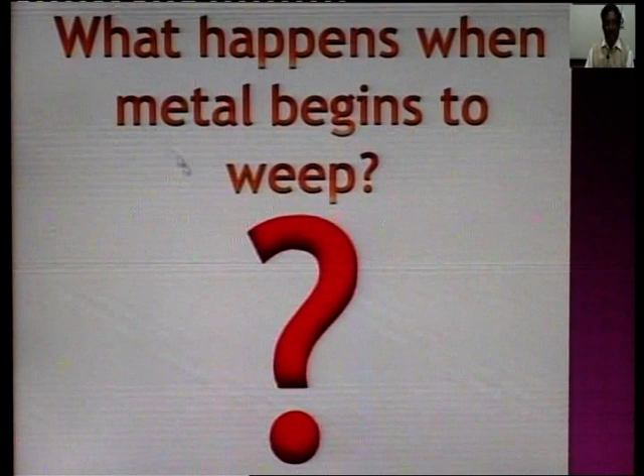So, to recapitulate, what is the importance of corrosion prevention? Why should we think about corrosion prevention? We also came across that corrosion can be described as weeping of metals. What happens when metal begins to weep? Does this lead to disasters?

Yes. For example, we have the Bhopal tragedy. If we see the history of the worst chemical disasters in industries, the first that comes to memory is the great Bhopal tragedy, which happened on the night of December 2nd and 3rd, 1984. The cause of this accident is not clear, but it could very well be due to corrosion, and if such is the case, it may well go down as the biggest fatal accident due to corrosion ever recorded in the history of corrosion accidents.

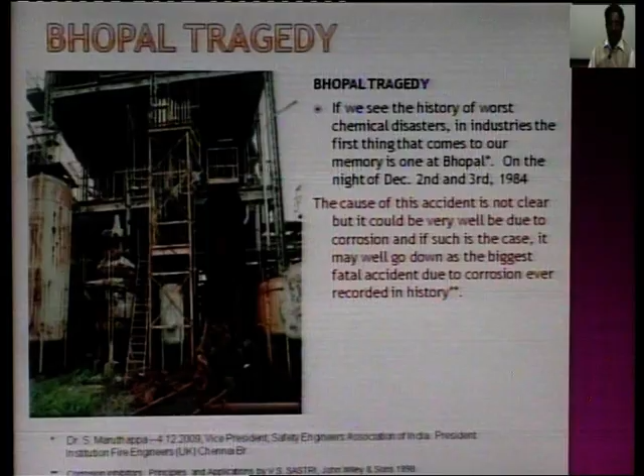Another infamous example of corrosion fatigue occurred 4 years later, in 1988, on an airline flying between the Hawaiian islands. This disaster, which cost one life, prompted the airline to inspect their airplanes for corrosion fatigue.

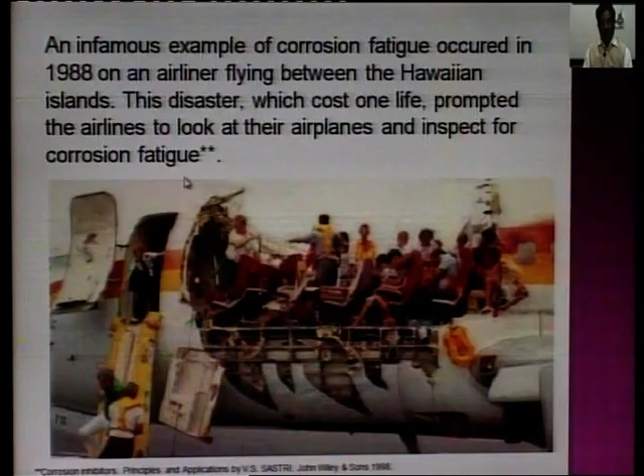So what lesson did we learn from the Bhopal tragedy? Corrosion can be disastrous, but is not necessarily a curse. Thus, to prevent any disasters by corrosion, follow all the measures for preventing corrosion, since prevention is better than cure. Keep all safety-related equipment in order, properly manage safety-related equipment regularly, and keep residential areas away from the plant as far as possible, as we are talking about industrial accidents like the Bhopal tragedy.

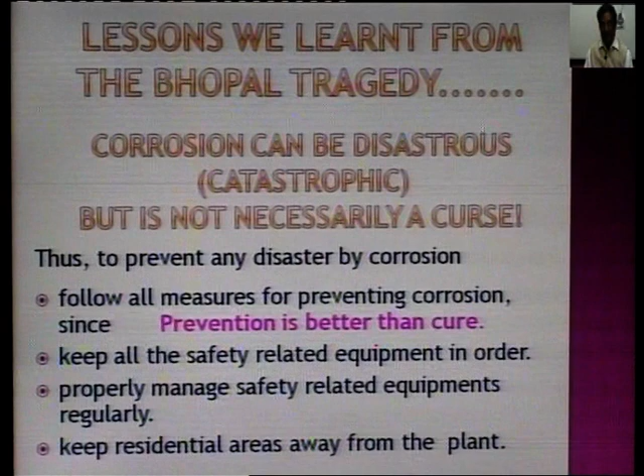So, today's lecture is entirely focused on protective coatings, by metallic coatings and non-metallic coatings. In the previous lecture you must have studied about prevention of corrosion by metal coatings. Today we will see some of the advantages and disadvantages of metallic coating, and we are going to discuss in detail about non-metallic coatings.

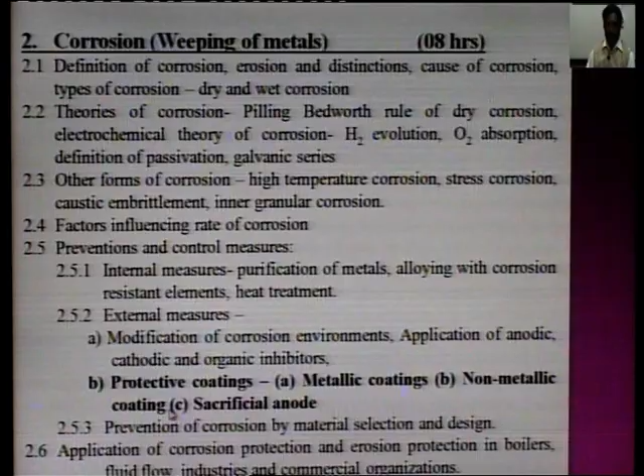So, what are the corrosion preventive methods? You have seen in the last lecture there are 5 of them. One is modification of the environment, second is modification of metal or material properties, which we call internal corrosion preventive measures. Third is use of protective coatings, which may be metallic or non-metallic coating. Fourth, cathodic or electrochemical protection. Fifth, corrosion prevention by material selection and design.

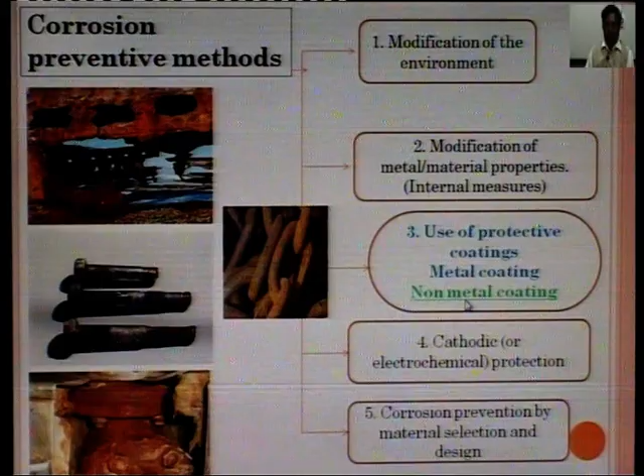So today's lecture emphasizes metal coatings and their disadvantages to some extent, but more focus will be on non-metallic coatings. So, use of protective coatings, either metallic coating or non-metallic coating. Let us look at some terminology commonly used when we study corrosion prevention, particularly by the use of either metallic or non-metallic coatings.

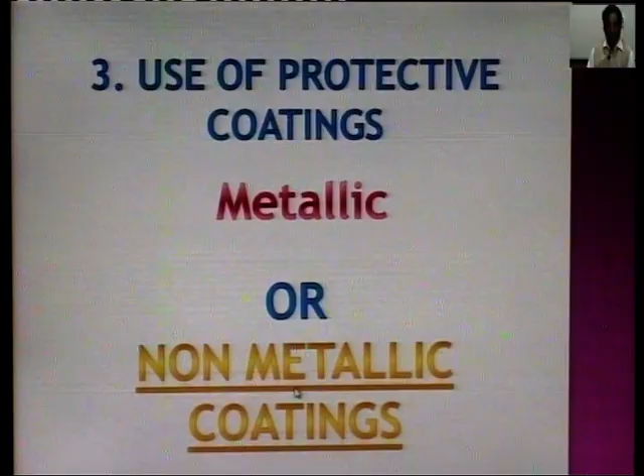The metal surface may be coated with metallic, non-metallic, or organic material coatings for protection against corrosion. Suppose this is my metal which I want to protect - the metal to be protected is called the base metal. The metal used for coating is called the protecting metal. So if I apply another coating of another metal on this, that is called the coating metal.

Let us take an example: iron is coated with zinc metal. In this case, iron is the base metal and zinc is the protecting metal, and such iron or steel is called galvanized steel, depending upon the way by which you have applied this protecting coating. In this case, it is metal we are using.

So, coatings on base metals - what are the merits of the metal which we use for coating purposes? As I told you in the previous slides, if I want to protect iron by zinc metal, then zinc is called the protecting metal.

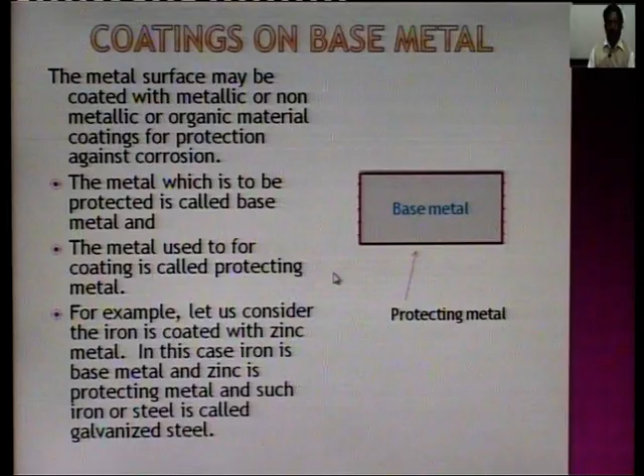On the other hand, if the protecting metal is more anodic, take the example we studied previously: galvanized steel. Here zinc is more reactive than iron. So, if the protecting metal is more anodic to the base metal, then protective coating of such metal on the surface of the base metal is described as anodic protection.

Anode is one which can undergo oxidation. So, in preference to the base metal, if the protective metal is more oxidizing in nature, then we can call that protection layer anodic protection. Anodic protection is a recently developed technology which we will discuss in comparison with cathodic protection.

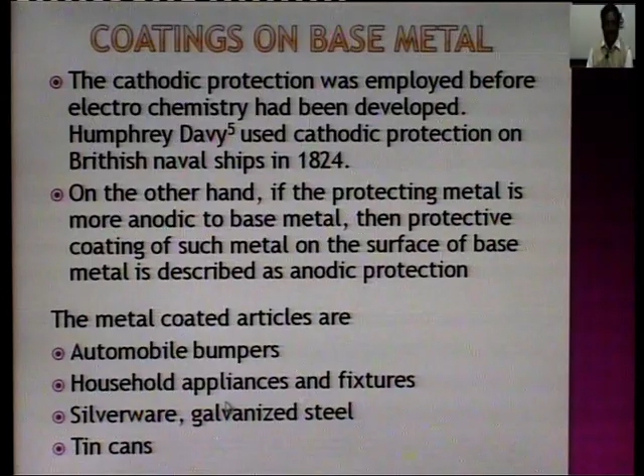Where do you find this type of protection? We find a lot of such protection provided to components of automobiles, household appliances, fixtures, silverwares, galvanized steels, tin cans, etc. So there are two types: cathodic and anodic protection.

Let us see the comparison, and this is what I wanted to emphasize. The utilization of cathodic protection is restricted to moderately corrosive conditions. What does it mean? If the condition of corrosion the metal is exposed to is a moderate one, then we can use cathodic protection.

However, anodic protection can be used in aggressive conditions, from weak to aggressive conditions. The installation of a cathodic protection system is relatively inexpensive, not as expensive as the installation of an anodic protection system. Therefore, this is having an advantage.

One more important point to remember about cathodic protection is that it must be applied in such a manner that it forms a continuous, strong, non-porous layer, so that it will not facilitate the formation of a galvanic cell. If it tends to form a galvanic cell, then more corrosion is expected.

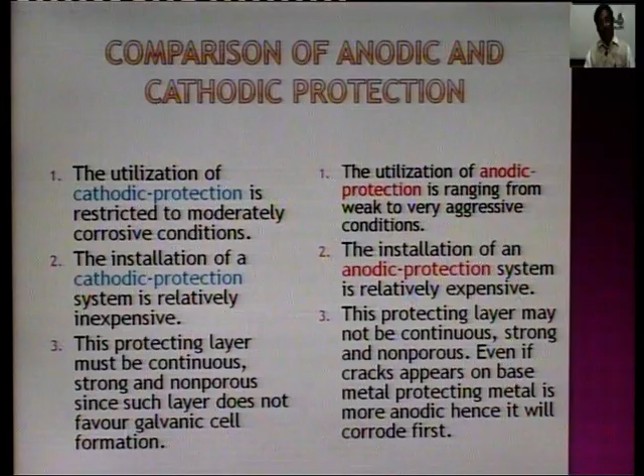So what are the other methods by which we can control corrosion? Here is an answer: non-metallic coatings. The chief function of a metallic or non-metallic coating, whichever we use, is to provide a satisfactory barrier between the base metal and its environment, so that wherever we use the metal, it resists that environment and does not undergo corrosion.

Non-metallic coatings are materials which are produced chemically or electrochemically on the base metals. We have to develop such coatings using materials that can be produced either chemically or electrochemically on the base metal. Such material must be less reactive and more corrosion resistant. When we protect a base metal, it must have less reactivity and more corrosion resistance.

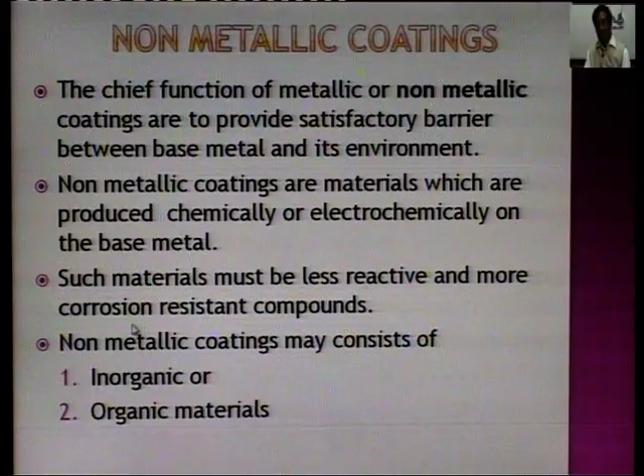Non-metallic coatings may consist of either inorganic or organic materials. This is what we are going to discuss in detail today. So let us see inorganic coatings.

Inorganic coatings may be surface conversion coating or chemical conversion coating. These protecting coatings have a dual role to play. Number one, coatings protect the base metal from corrosion — this is the first primary objective. Secondly, they provide a surface ideal for painting or other decorative protective measures. So these are the two objectives with which we intend to coat a base metal with inorganic coatings.

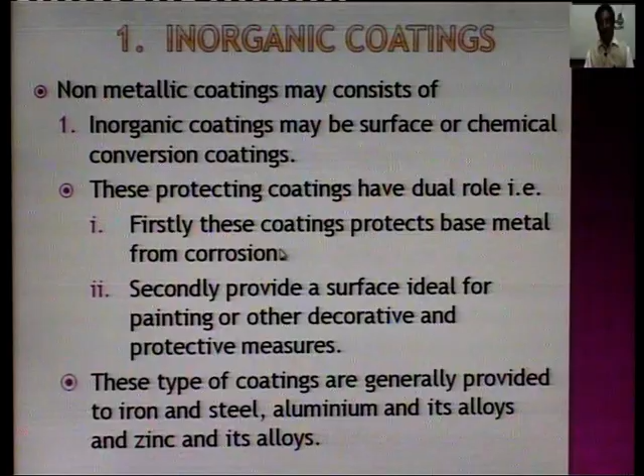These type of coatings are generally provided to iron, steel, aluminum and its alloys, and zinc and its alloys, so as to make these metals and alloys fit for corrosion resistance in any environment.

By chemical conversion, coatings are generally produced on the base metal by immersing it in a solution of a suitable chemical reagent, which reacts with the metal surface and develops an adherent coating.

These coatings may be a phosphate coating, a sulphide coating, a selenium coating, an oxide coating, a chromate coating, anodized coating, ceramic coatings, or slushing compounds. The names themselves suggest it: phosphate coating is an inorganic compound, sulphides are metal sulphides, selenium coating and selenides, oxides as oxides of that particular metal which can be coated as a protective layer, chromate, anodized ceramics.

We will discuss these from the point of view of examination — these points are very important for both diploma and degree students, wherever you are studying the corrosion chapter, as these inorganic coatings are of great importance. Now let us take the first one, phosphate coating.

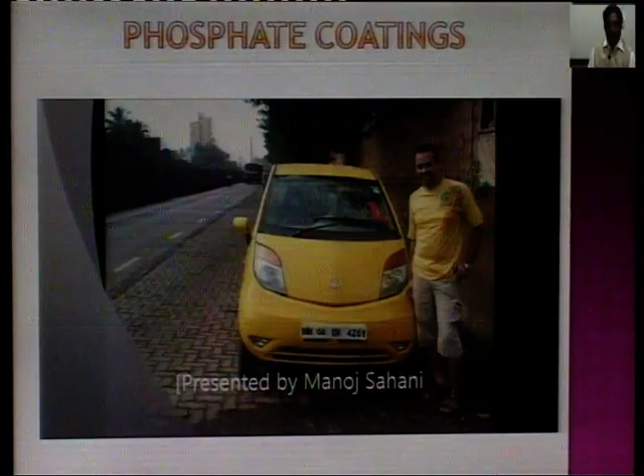I have a video clip which I am going to skip now — here we can see that a coating is being done by phosphate coating before this type of painting is applied on the BIW, body in white. Next, we will move on.

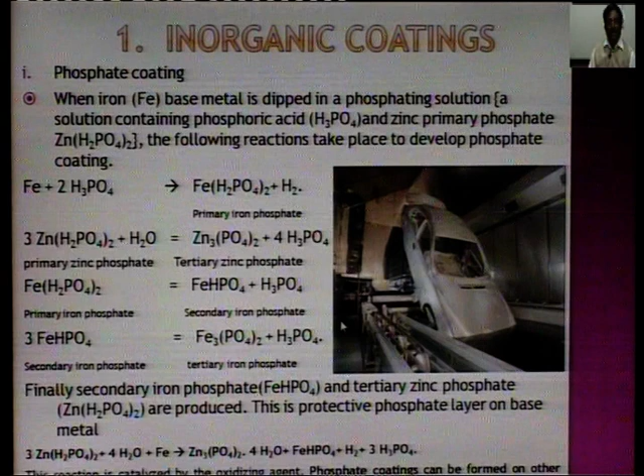The second is sulphide coating, as we have seen in the previous section — phosphate coating, sulphide coatings and selenium coatings. We will now study what is known as sulphide coating.

Base metals on which a phosphate or oxide protective film is not easily formed, whenever the metal oxides are not easily adhering or the phosphate film is not adhering, such base metals can be provided with sulphide coatings, which are quite effective but only for a short period. Remember, it is only for a short period, since this coating undergoes oxidation and is therefore short-lasting.

Therefore, sulphide coatings are generally short lasting, because they will be getting oxidized due to the plenty of oxygen available to them, and as a result they will get converted into sulphate, which may be leached out whenever water comes. So, therefore, they will be short lasting.

Next, come to the selenium coating. Oxide and sulphide coatings are stable only at a low temperature. Remember, the oxide and sulphide coatings, we are going to talk about oxide coating a little later. However, we have talked about sulphide coatings. So, these are effective only at low temperature and become ineffective at high temperature, hence selenium coatings are developed.

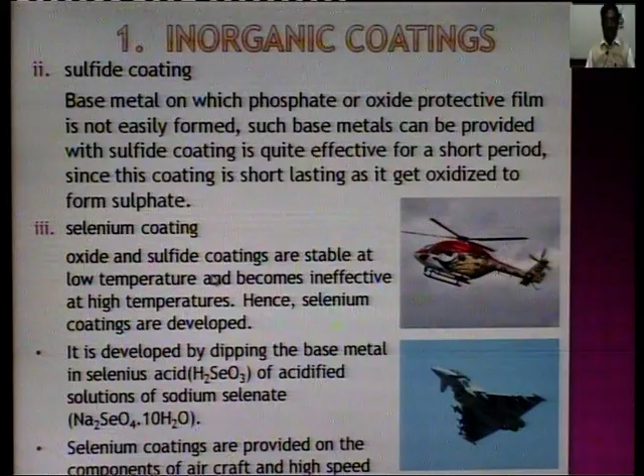Where do you find this type of coatings? The selenium coatings are provided on the components of aircraft and high speed automobiles, jet aeroplane components, light combat aircraft, which are being produced in HAL, Bangalore. They are normally coated with selenium coatings. So, this is about selenium coatings.

Now, let us move on to the next inorganic coating. What is the next inorganic coating? That is oxide coating. All of you have heard about it. Oxide coatings can be formed on the surface of metals like iron, zinc, aluminum, tin, chromium and nickel, etc. The oxide coatings are normally produced by dipping the base metal in concentrated nitric acid. As you know, concentrated nitric acid, HNO3, is an acid as well as an oxidizing agent. So, when a metal is dipped in this nitric acid, it develops its own oxide layer, and that is insoluble in nitric acid.

Normally, metallic oxides are alkaline in nature. So, when the oxide is produced on exposing to acid or an acidic atmosphere, they generally dissolve, but here these metals produce such an oxide layer which adheres to the surface of the metal quite strongly, and therefore further reaction with nitric acid or any acidic atmosphere becomes less. As a result, they provide corrosion resistance to these metals. Such a tendency to protect a metal by itself developing an oxide layer, we call passivity.

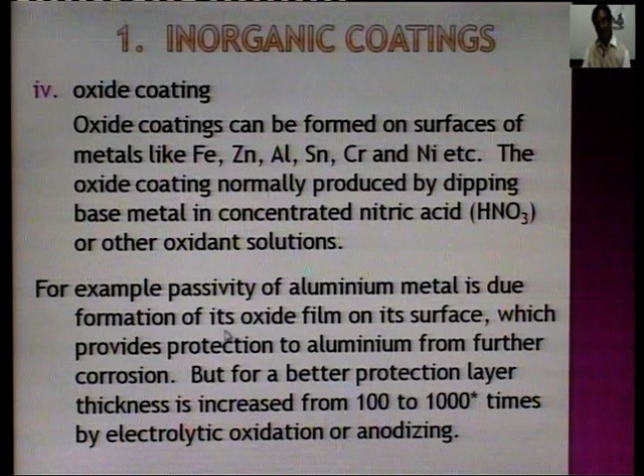You must have studied the Pilling-Bedworth rule here. The Pilling-Bedworth rule for chemical corrosion, what it says. There will be a question, explain the Pilling-Bedworth rule for chemical corrosion. So, let us take some other definitions which are related to understanding the Pilling-Bedworth rule. It is a qualitative rule.

The ratio of the volume of metal oxide formed as corrosion product to the volume of metal is called the specific volume ratio. This is very important. Smaller the specific volume ratio, greater is the oxidation corrosion. Means greater is the oxidation corrosion, provided the specific volume ratio is smaller.

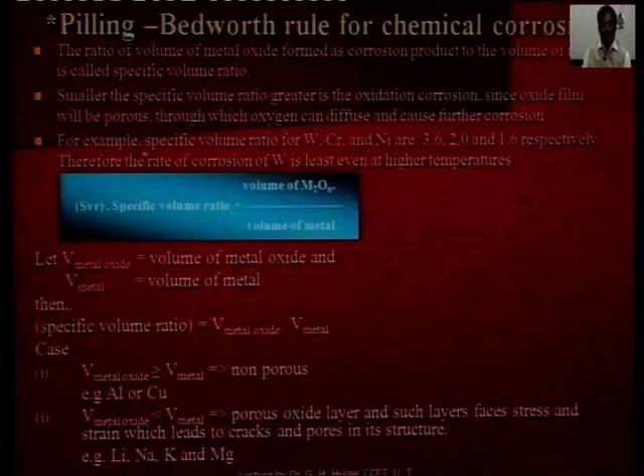It will be smaller when the volume of the metal is greater than the volume of the metal oxide formed. Therefore, the oxide film developed on the metal will be porous. It has pores, small holes, through which oxygen can diffuse and cause further corrosion. So, for example, the specific volume ratio for tungsten, chromium and nickel,